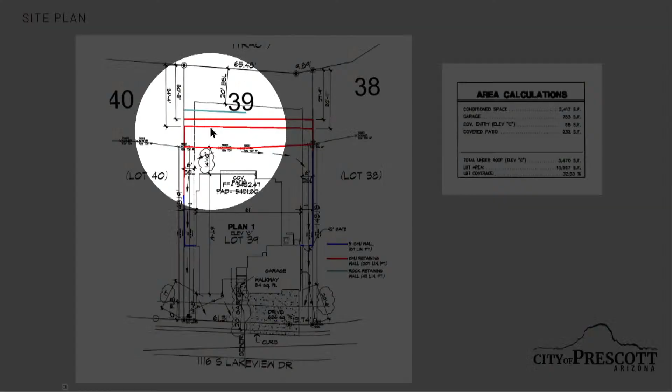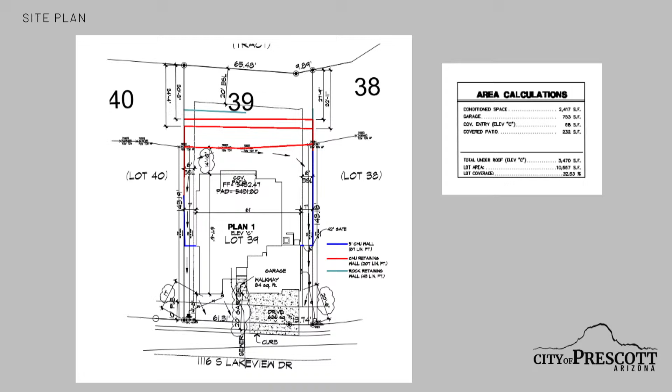But if I could get some clarification on just how much backyard there would be if the house was moved back so the code could be satisfied. These lines draw where the terracing is, and the very lowest part of that terracing, it terraces up. So there's not really a safety issue because the walls are there to prevent anybody falling, but this terracing in the back, that's the question, that they wanted to move the house up to allow the property to have somewhat of a backyard using this model plan.

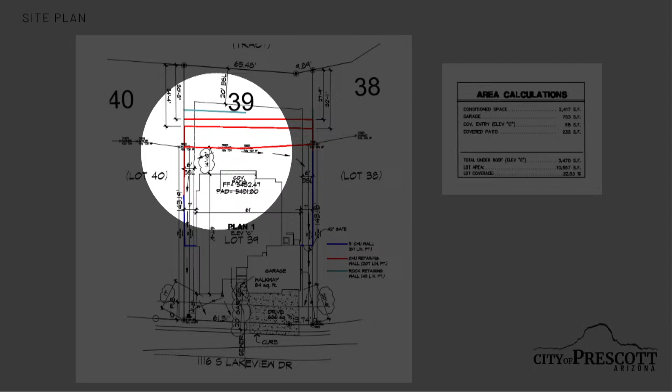So on the description here, how many feet is it from the back wall of the house to the first terrace wall? It looks like it's 14 feet, shows the number right there, I think it's like 14 feet something inches, I can't read that far from here. So if the house was moved backwards to comply with the code, that means 2 feet closer to the terracing wall, it would have essentially a 12-foot backyard before it hits the first terracing wall. Is that correct? Yes.

Okay, and I guess my other question, I don't mean to be dominating, was I read in the packet there were only 3 house plans approved by the city and the HOA, I'm not sure how that works, so I'd like clarification on that if the applicant could provide it. But I think I saw in the packet there were only 2 housing plans that could fit on this narrow, short lot, so for maybe some clarification there.

So for each phase, there's model plans that are approved. They just come in with a site plan. The plans are already approved for the house because these are leveled to be flat lots, and then they show us how they're going to fit on the site plans. That way it kind of fast tracks those type of communities that have the model homes, helps with the processing of site plans. We just verify it meets the setback.

We did issue a permit for this lot that did meet the setback, but then they came forward wanting to adjust it to allow for a bigger backyard. When you say approved, do you mean by the HOA or also by the city? By the city, they came in with a site plan that showed a setback meeting the requirements, and we approved it, but then they came in asking to amend that. So there was a way to have a house built on this lot that did comply with the code? Yes. Okay, thank you.

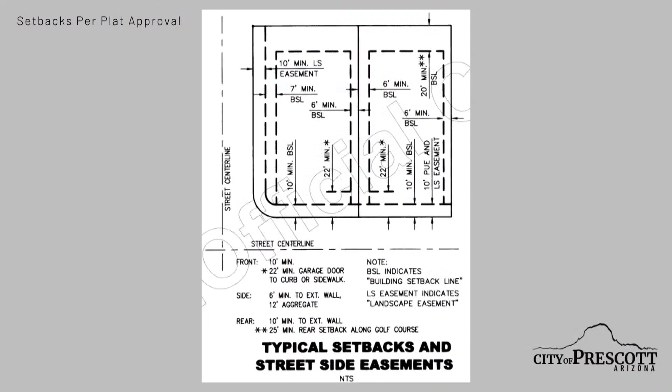Mark Huckness again. Could the retaining wall be moved back? Is that an option? Well, if you look at the picture, it runs across all those lots in the back. Let's go back to the imagery. As you can see here, it goes across the whole thing, so it would have to be re-engineered, redesigned, and rebuilt the whole way across these lots. That would probably not be very cost effective, I would guess.

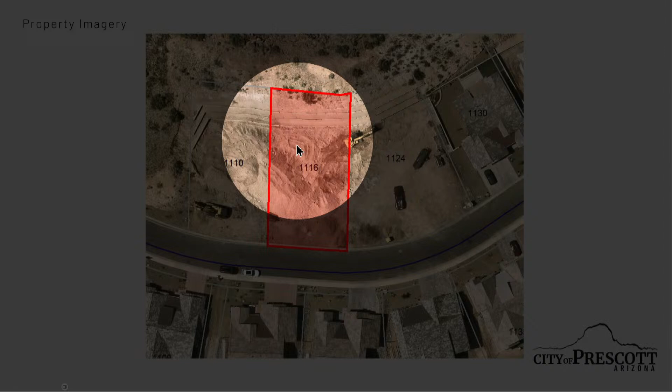But if that was thought out, the wall could have been moved back as an option. Because of the terracing, they have to have a gap, I think 4 feet between each wall, because of the terracing per our code. So if they moved it back, it probably wouldn't meet that requirement. Okay, that's helpful, so that's not an option. It doesn't appear to be. Thank you, Tammy. You're welcome. Thank you, Mark.

All the terracing and grading was done when the subdivision graded the lots. That's when all this is done, before the house permits started coming in. So all that was in place before they started developing the lots.

I have a question. Would this fall under the category of a self-induced hardship? It could, because the house can be moved back to meet the setback, or redesigned to move the garage back. The house itself being set forward, it's the garage and driveway length that is our concern, because this doesn't have a sidewalk, there's no buffer there. It's for a large truck.

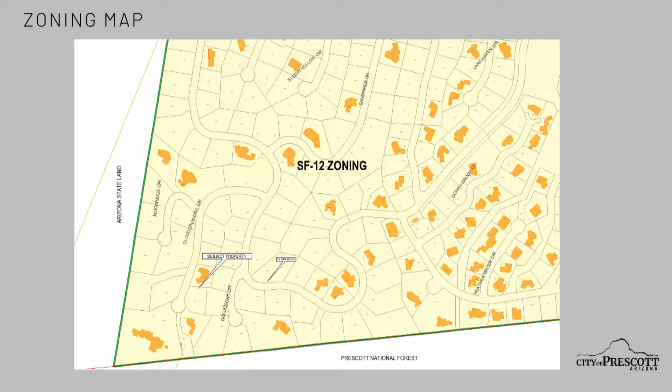Here is an aerial view. Forgive me if I get these crossed. I believe this is National Forest, Arizona State Land, or maybe City of Prescott. But either way, this land is government owned. So this is really at the edge of the subdivision, if you will.

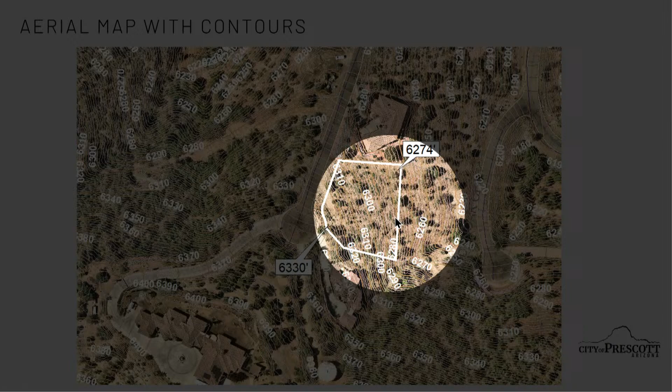I thought it pertinent to include the aerial map with the topographical contours, so it just shows essentially the drop here. Let me do the math in my head real quick - 55-foot drop across it. So it is steep.

So I did the calculations using the same formula we used to grant topographical exceptions. The average slope is about 30%, so it's substantial. I did a search for other variances granted within the vicinity. I was only able to find one, about three quarter miles away, and with that variance they got an approved reduced front setback and height increased by 7 feet.

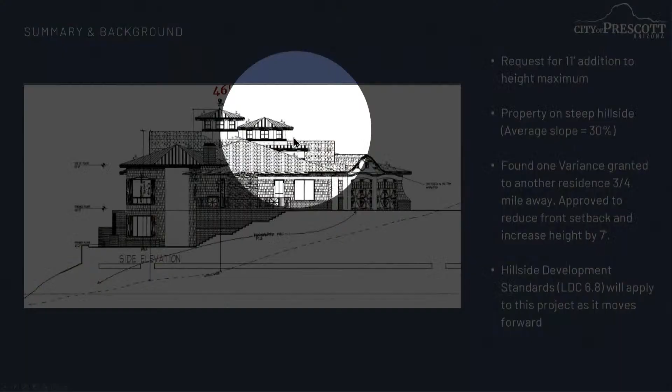So a solution to the height variance - a question for staff - if the cupolas or turrets were eliminated, would it meet code? I'd have to go back and pull the dimension, but I still think it would still need a variance. If the cupolas disappeared, it'd be about 40 feet tall, so we'd still need about a 5 foot variance, but it's a reduction. Okay, I appreciate that.

Board, are there any more questions? Yes, Mr. Chairman, Tom Davis - I can't see by the drawings in front of me, but if that highest cupola is removed, what is the height of that roof pitch? About 40, so it's about 6 feet for clarification. He's just asking the same question in different words - right, it would still need a variance. Just clarifying for me what was said and the way it's working. Okay, thank you.

Okay, at that point, not hearing any more comments from the board, I'm going to go to the public. Mr. Jim Smith.

Yes, my name is Jim Smith, and my address is 699 Cloud Crossing, one lot above this. But the only person that has not been discussed in all of this consideration is my lot, because I'm right behind it. If it's built as designed, I look right out of my living room and see this house.

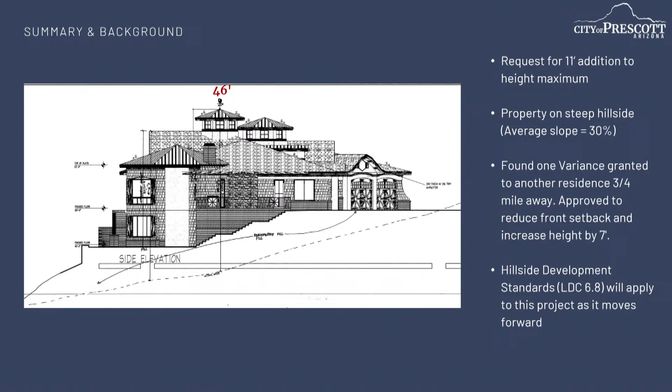41 feet, 6 inches. That is a good benchmark. Of course, the grade point is different right underneath it. But if both cupolas were eliminated from this design, maybe replaced with skylights, you'd still get the light issue, which would be great.

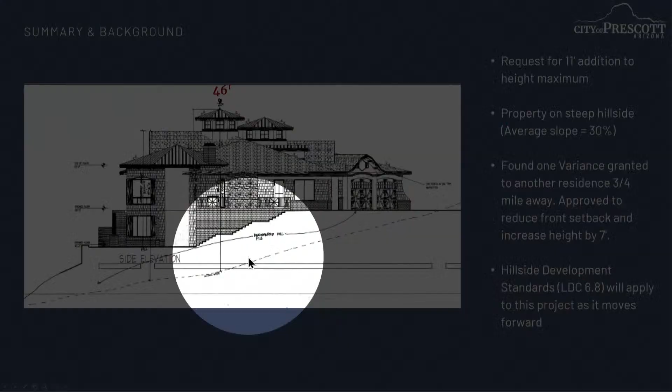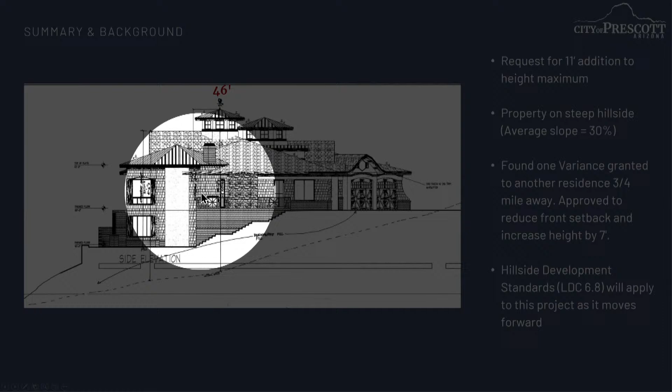Yeah, you see it does fall. So here, it would probably be less than 41.6, but like Tom was saying, he would know the best - it'd be about 40 feet. So it would still need a variance, but essentially a 5 foot or so variance.

Correct. And if I understand correctly, the designer, the architect, you're willing to consider a redraw? The owners want to develop this lot any way they can. They would prefer the lantern or the cupolas, and the committee preferred them too. But we just want to develop the lot, and whatever the variance board decides, we'll go with. We're submitting what the committee and the owner preferred first.

Thank you. And just procedurally, maybe Matt could clarify - if we denied it, or put it off until a redraw of the house plan could be undertaken, which of the two would be better: to deny, or delay until a new plan could be submitted?

You can take multiple approaches. One is if you want to move on it today, knowing you have a voluntary indication from the representative of the homeowner, you grant a 5-foot variance and be done with it. Then they can go back and figure out how to design the lot. I think that'll be the cleanest way. But if you want them to come back, you can continue this and say we're not inclined to go the 11 feet, but can you bring something back that we can live with?